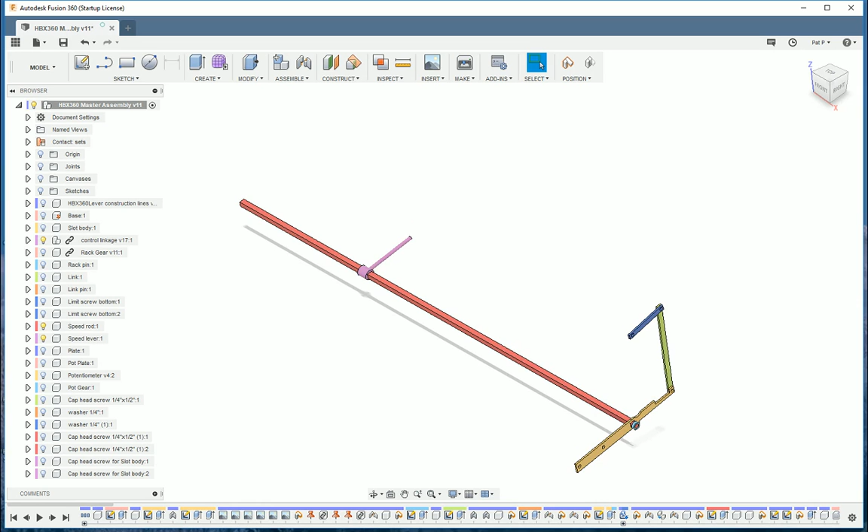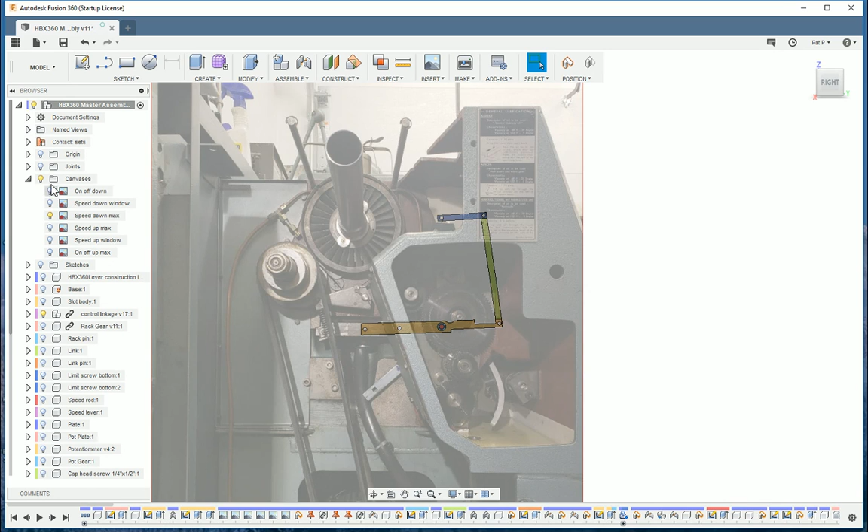So here you'll see this is one of several pictures I've taken of the lathe, to figure out where this mechanism sits in regards to everything. And so you'll see down here, this is the lever at its max in that direction. And if I turn this on, that's a max down, and now you'll see right here, this is kind of the max up position, and then I can turn this one off, and now we'll just have the one.

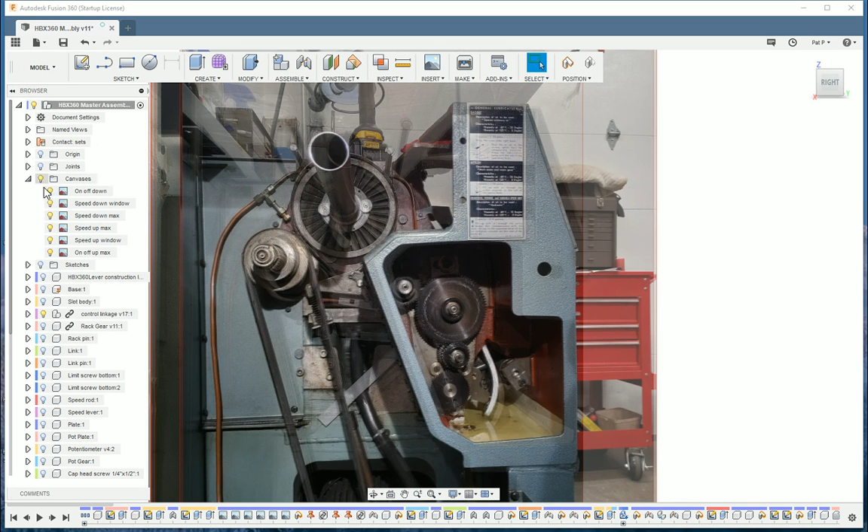So I was able to overlay all these pictures on here and kind of work out some angles. So this is a menu with all the different little rods in here. They're a little difficult to see the way it's set, but that is how we got to this. And I made this diagram of sketches to represent these angles of movement. And these outside two here are the maximum distance that this will move. It's been constrained not to move that far.

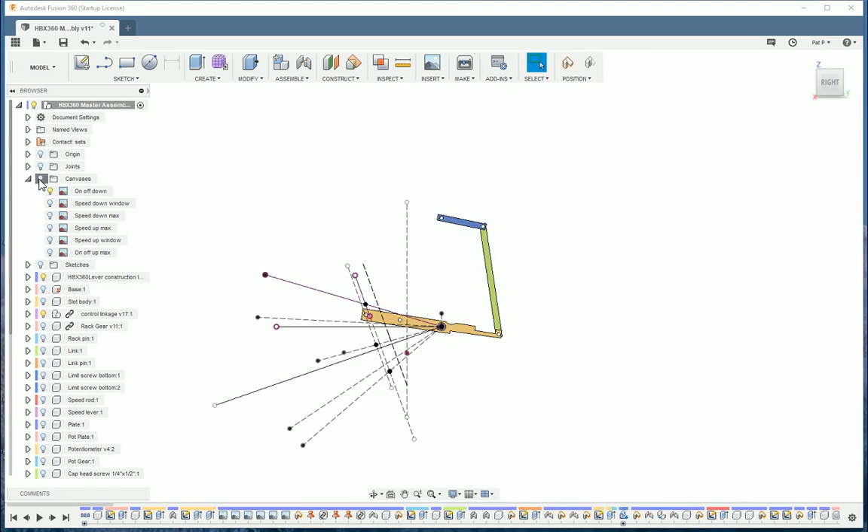On the other side of this portion of the lathe here, this little space here, you can see the garage door through here. There's a little lever out here, and there's a cutout window. So as this lever moves up and down in here, it has a little pointer that sticks out here that shows up in this window, and it's a mechanical indication of the speed of the lathe.

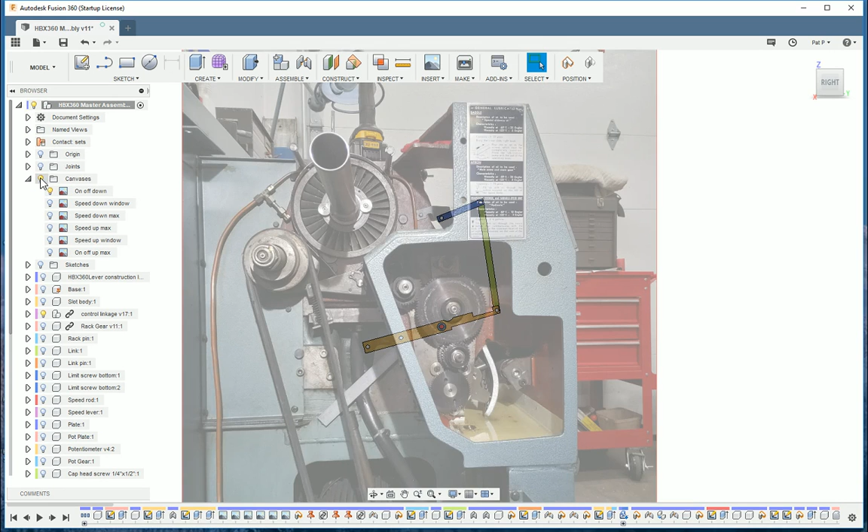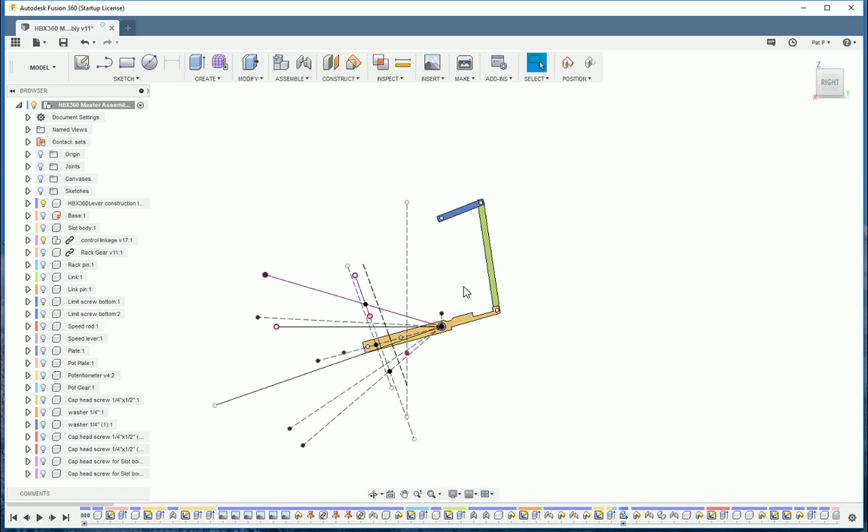And so that's what all these are. Now this is the max distance of the window here. So this is speed up and this is speed down. So this would be 0, and in the window this would be 3,500 RPM. I give a little extra than that. I'll show you there's another limit to keep the potentiometer from running. But so this is the native lever, and this is how I got to this. So I'm gonna pause you and bring in a different view.

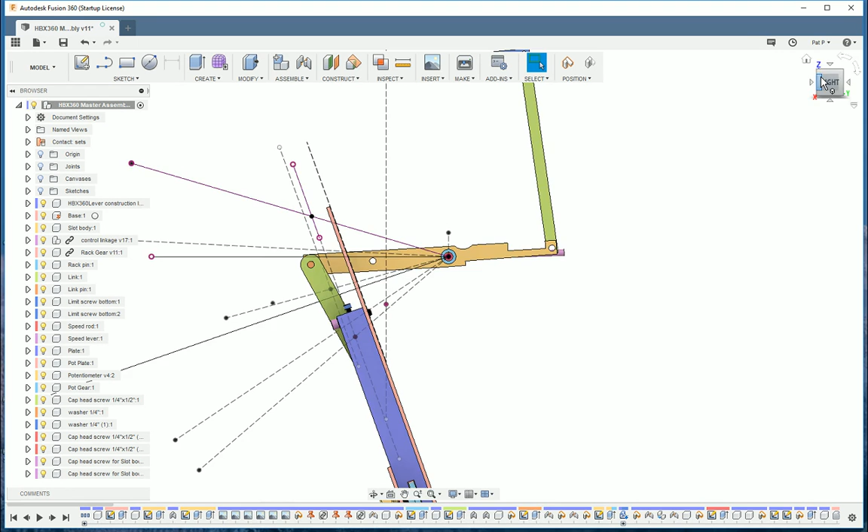So here is the entire mechanism as far as I have it drawn right now. Now this is only for the speed control. You'll see right here, this is another point, and there's going to be another lever that will rotate around this axis just like this one does, and it will run forward, reverse, and off, and it will line up right beside this one, but they'll come out the same place.

And then that mechanism will in time be built in this space right here, and a lever will come out here and it'll come back, and it's going to run a cam and some sub-miniature micro switches. But for now, this is where I'm at. This is just the speed control. I'll do another video when I have the forward reverse control.

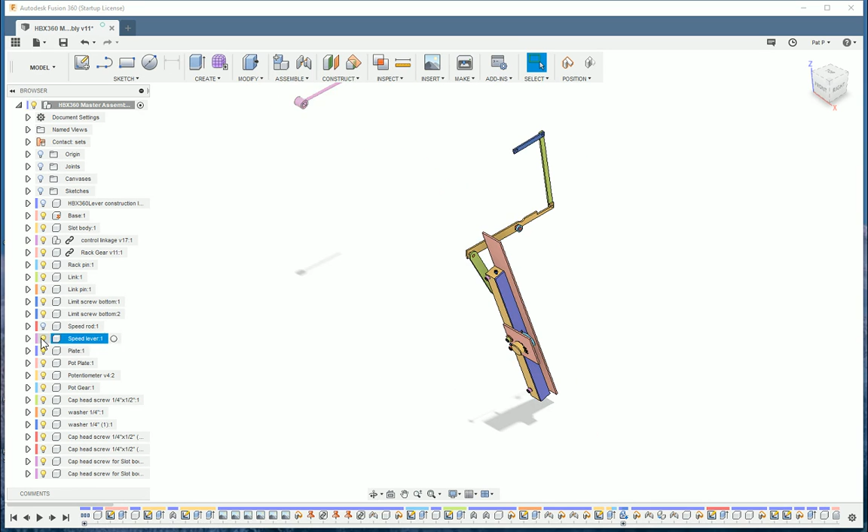So to give you an idea of things here, so you understand all this, we'll get rid of the long lever that goes on the lathe, just to make our life a little easier as far as viewing. So here we have just a slot in the back, so this here runs up and down and pushes a pin in and out of that slot.

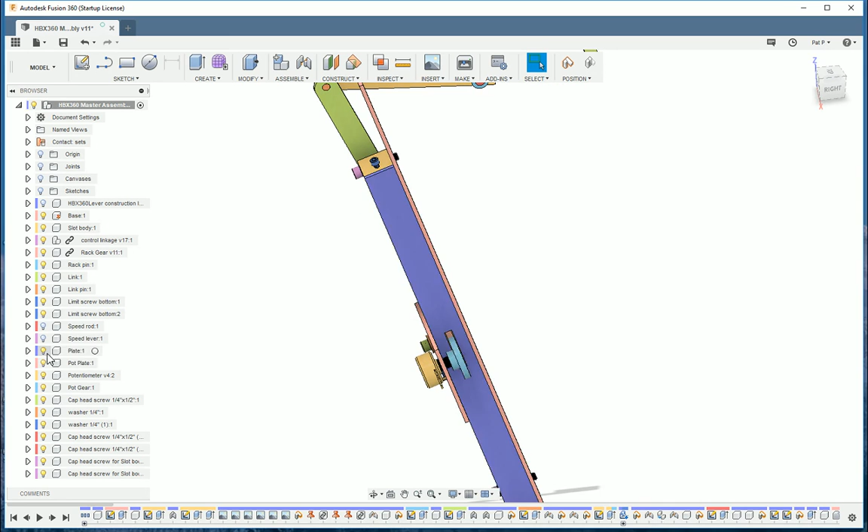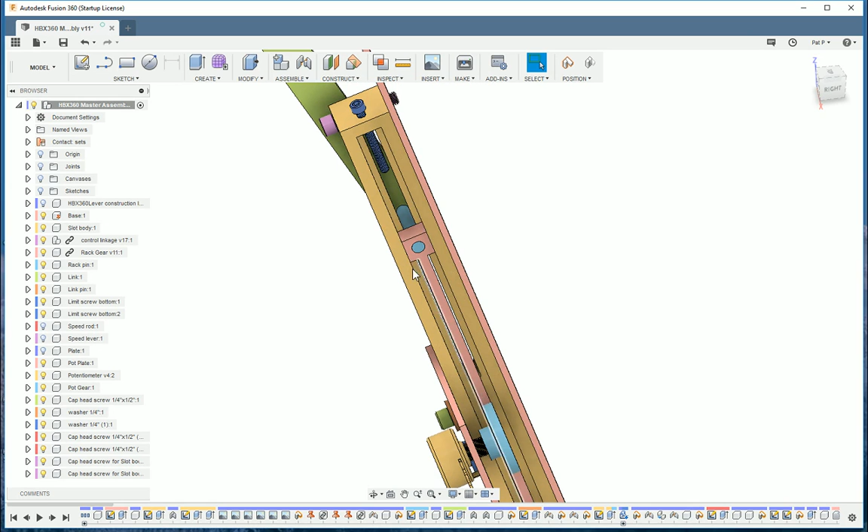And then if I come back around here on the right side, this plate here has a slot in it that the pin runs in. So if I remove this plate, now you can see the internals of the mechanisms. So this right here, it's not drawn well, but it's a rack gear, and this is a potentiometer gear. And this rack runs this up and down, and the rack is held in place by these two crossheads that I will solder onto the end of the rack to keep it captured within the mechanism. So we put the plate back on, and it covers everything up.

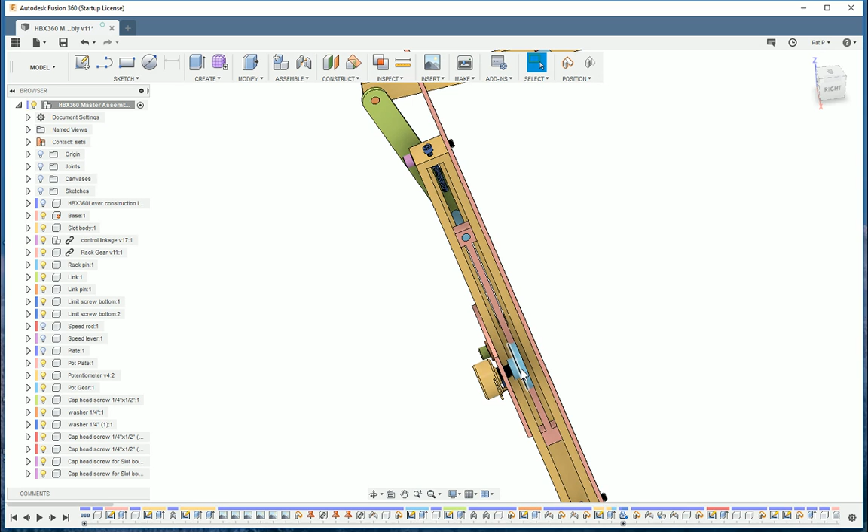And then these two screws here, this one on the bottom and this one on the top, will limit the travel of this rack gear so that it won't outrun the rotational limits of the potentiometer itself. And that's basically the system and how it'll end up working.

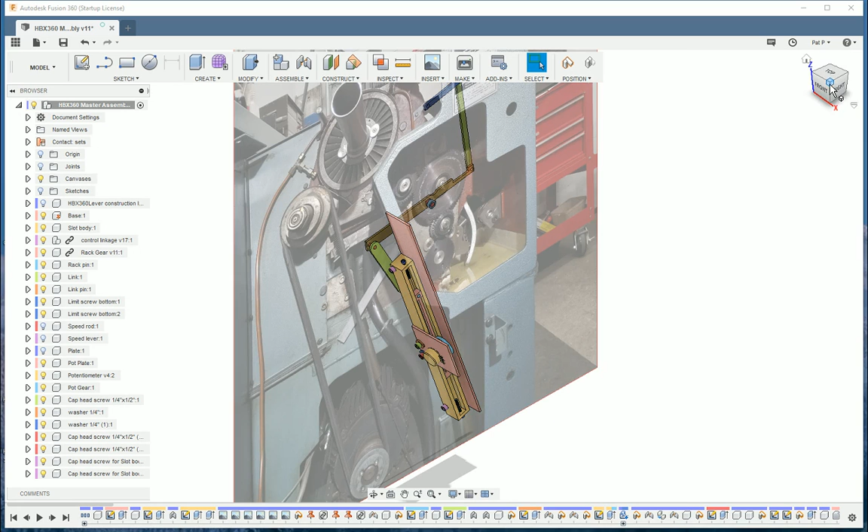And then this plate here will mount onto the lathe. There's this flat surface on the lathe that it will mount to with some screws that go right through here and through here. And then this will just hang out into space down here. It shouldn't be a problem. I might have to do something to stiffen it. I won't know until I actually start building it. This is just the design that gives me something to build.

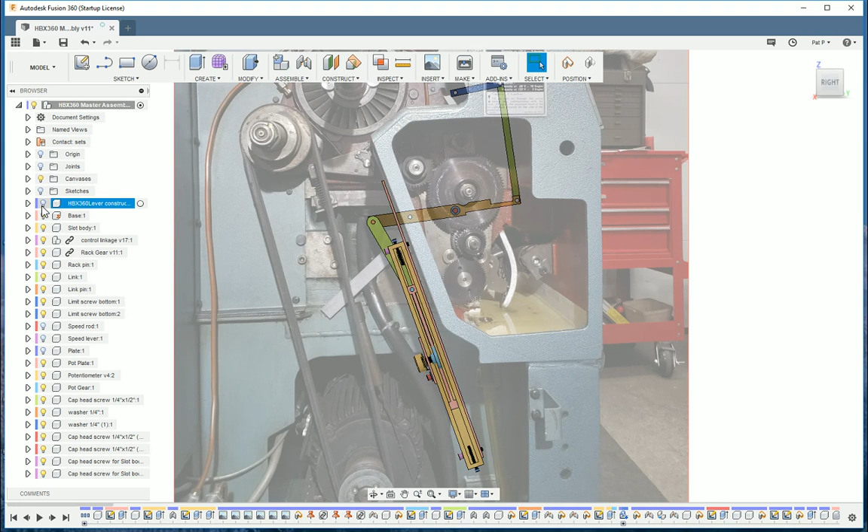So I hope that explains things so you guys understand a little better. This mechanism I have been working on, I don't know what version this is. This is the third or fourth one I built, but this one should work. So, like I said, up here we'll have another part.